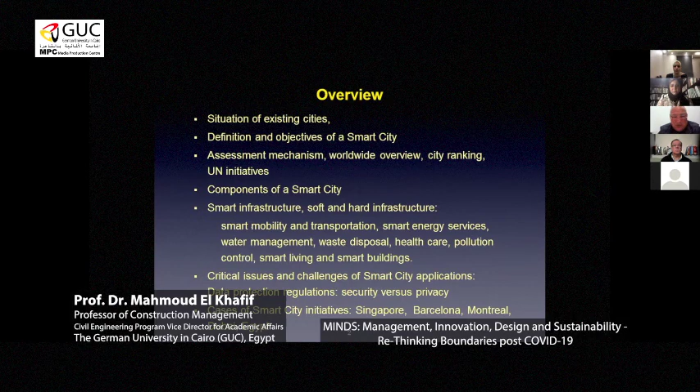First, we'll talk about the situation of existing cities worldwide, and then let us define and give the objectives of a smart city. Something about assessment mechanisms, a worldwide overview, city ranking, and UN initiatives, and then the different components of a smart city infrastructure, soft and hard infrastructure, a word on critical issues and challenges, and if time allows, I will give you some cases of smart city initiatives in Singapore, Barcelona, Montreal, Dubai, and also what Egypt thinks about smart cities.

The worldwide situation is characterized by a very rapidly growing and increasing growth in population. By 2050, we will expect to have something like 10 billion people on Earth. Along with this goes an increasing growth of urbanization, meaning we will have, by 2050, 70% of people living in cities. That means we will have a high concentration of resource demand, consumption, and pollution.

Regarding Egypt, we are already now 3.2 million over the forecasted population number. So what has been forecasted 10, 20 years ago has been exceeded by 3.2 million as per now. In the same time, we can see a significant migration from rural areas in the south into the urban northern parts, with a high concentration in Greater Cairo.

Significant development efforts to decentralize the population into new communities are underway. So the government is active in building new cities to relieve Cairo, or Greater Cairo, from ever-growing population. But this also needs some time and will take certainly a couple of years once people are prepared to move outside of their common living areas.

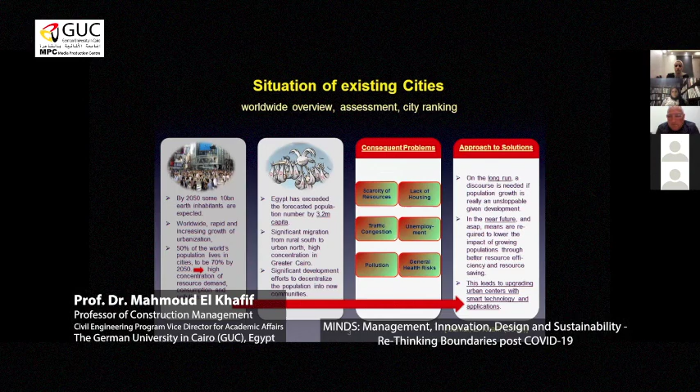Definition and objectives of a smart city. There is no commonly agreed definition of a smart city, but there are shared elements among the most prevalent definitions - for example, the usage of ICT, information and communication technologies. Everyone aims at improving the infrastructure and tries to ensure economic, social, and environmental sustainability. These are the commonly agreed shared elements, but there's no overall agreed definition of what a smart city actually is. But we will learn by example, and hopefully we get a bit nearer to this.

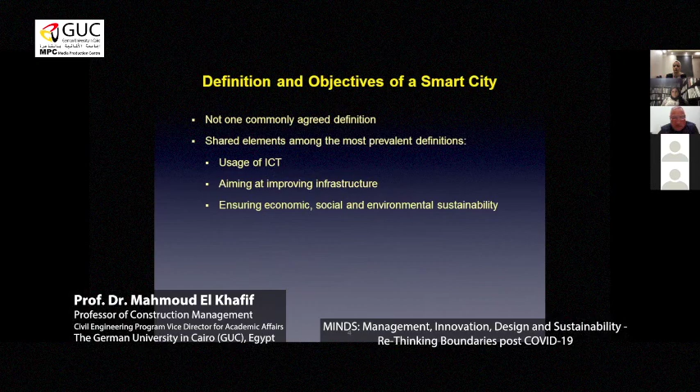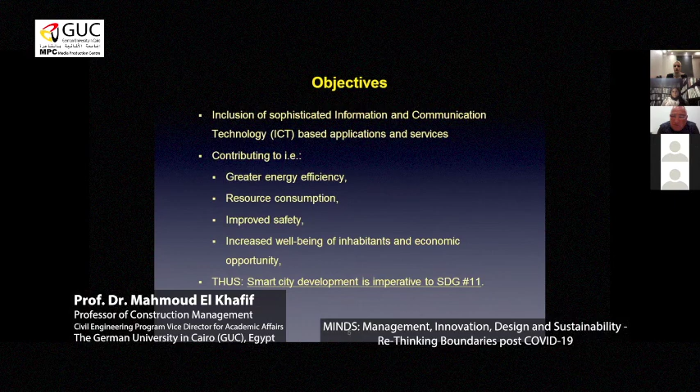Objectives: inclusion of sophisticated ICT-based applications and services, contributing to greater energy efficiency, resource consumption, improved safety, increased well-being of inhabitants, and economic opportunities. Thus, smart city development is imperative, to which I have just alluded.

How to assess the smartness of a city? There are different organizations - one of them is the ISO, the International Standardization Organization, and United for Sustainable Smart Cities initiative, and the IMD, the Institute for Management Development, stationed in Lausanne, who have initiated or developed a Smart City Index to rate the efforts and achievements of communities in reaching certain limits.

I will not go into all the details, time will not allow for that, but for example, the ISO rates and assesses community infrastructure, mainly for energy, water, transportation, waste, and ICTs, against enhanced technological performance that is designed, operated, and maintained to contribute to sustainable development and community resilience.

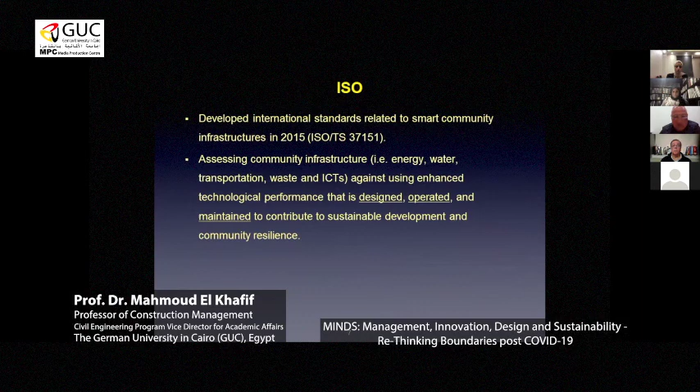The United for Sustainable Smart Cities Initiative has developed KPIs, key performance indicators, to quantify efforts and allow a listing or rating system with three main dimensions: economy, environment, and society and culture, with defined sub-dimensions that can all be rated.

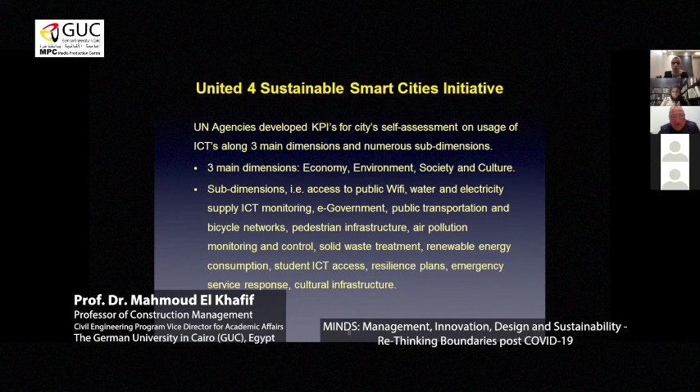The IMD Smart City Index, developed every year, compares 102 cities against usage of technology in 5 key areas: health and security, mobility, activities, work and school opportunities (education), and governance, with indicators that are rated to allow for a certain ranking.

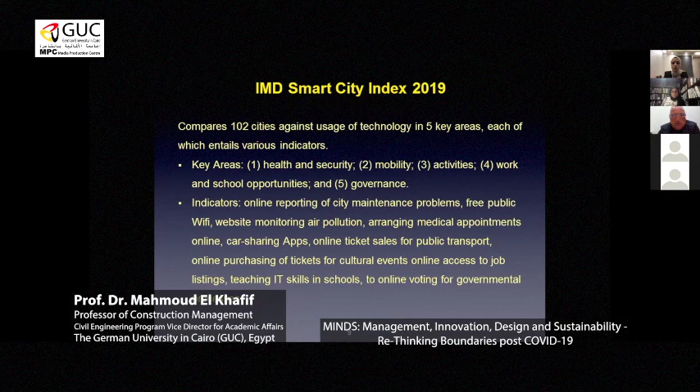In 2020, like in the years before, Singapore topped the list, considered a AAA smart city, worldwide leading. Number 2 has been Helsinki in Finland, then Zurich, Auckland in New Zealand. Number 5, Oslo. 6, Copenhagen. You can see quite a high concentration in the northern part of Europe. Then Geneva, and Taipei, Taiwan.

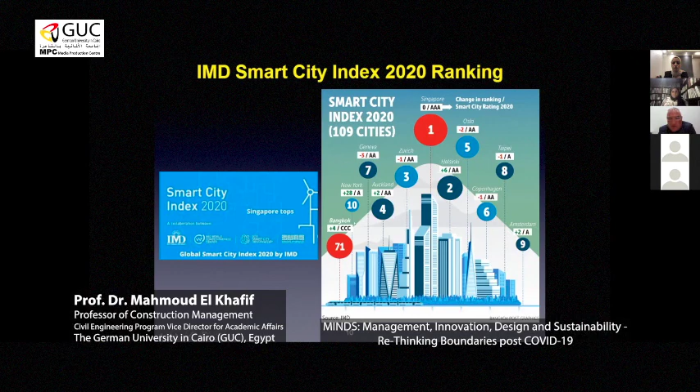Number 9, Amsterdam. Bangkok, with a CCC rating, has ranked 71.

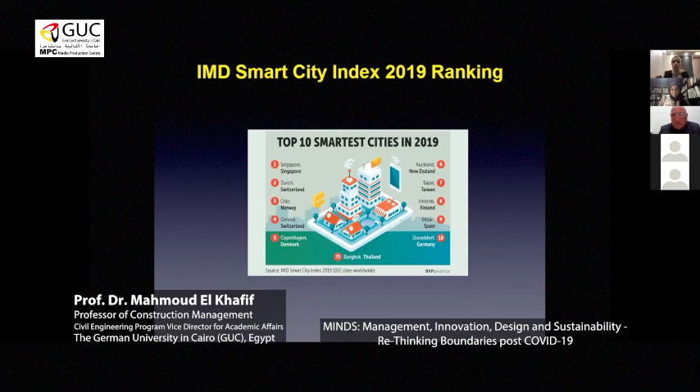In 2019, Singapore was already number 1, but there was a little bit of reshifting. I'm quite happy that my old hometown, Düsseldorf in Germany, was among the first 10 cities, though they fell back in 2020 to rank number 13.

The total of 102 cities is listed here. We can see Cairo at rank number 99 in terms of smartness worldwide, but other cities like Sofia, Mexico, Kiev, Cape Town, Athens, and Rio de Janeiro are not very far away.

So we are in a group of cities worldwide where our ranking is not very good at the moment, but this also offers a very large potential for improvement. I see such challenges as a chance. Little changes in certain fields will already give us a much higher ranking and will hopefully improve the living conditions of the citizens to a certain degree.

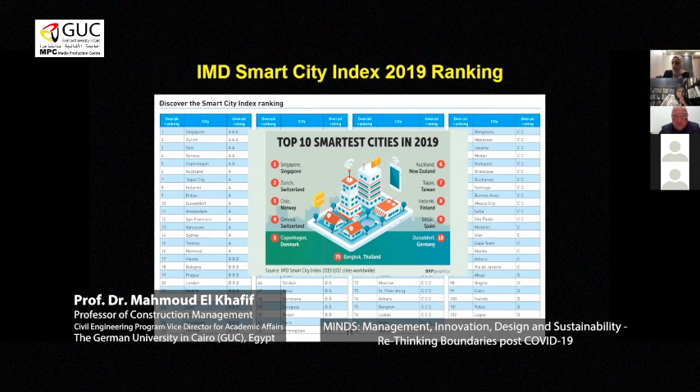Coming now to a small repetition of the SDGs, I will confine myself to number 9 and number 11. Number 9 is mainly about infrastructure, industrialization, financial services, and sustainability. Infrastructure, our field as civil engineers, is something we have to think about, but it's not only civil.

The interesting part I found when I prepared the presentation is that the smartness of a city brings together many disciplines. It's not only civil engineering, or only ICT, or only IT. Many disciplines have to come together and present, in the end, a conglomerate that represents a smarter approach.

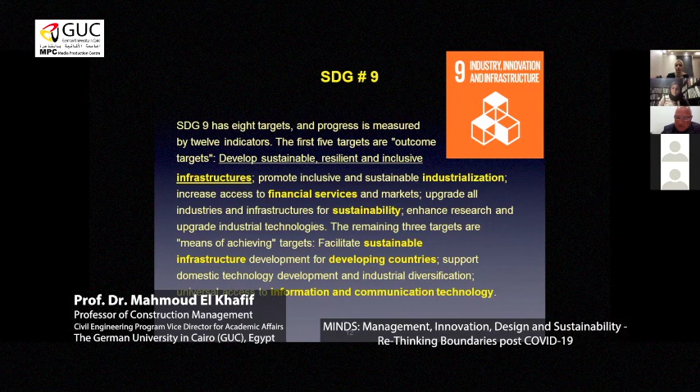SDG number 9 talks about infrastructure, and number 11 aims at an inclusive, safe, resilient, and sustainable city. Urban challenges currently include congestion, rising pollution, lack of adequate housing, lack of funds for energy and basic services, declining transportation systems, and amplification of challenges due to rising population in urban cities.

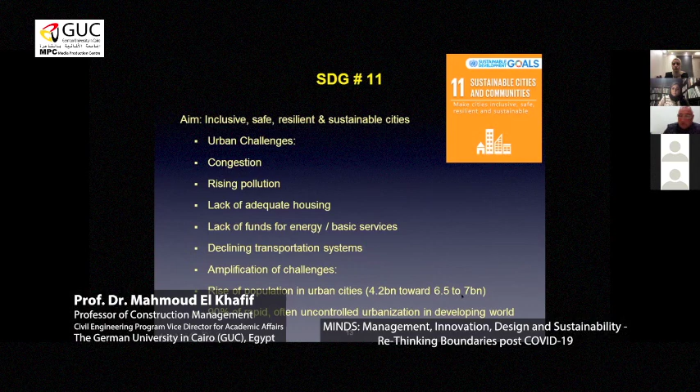We will reach something like 7 billion people, almost the entire world population today, living in cities by 2050.

So what are the components of a smart city? Number one, smart infrastructure, which includes public transportation -- a public mass transportation system, as opposed to individual transportation -- as well as water and wastewater management. Water will become an ever-decreasing commodity.

Especially here in Egypt, we will face challenging times, I would guess, with increasing population and, in the future, less water supply.

Energy efficiency: I recently read an article and was surprised to learn that in Egypt, for example, the energy consumption per unit of production is something like 3 to 4 times higher than in industrialized countries like Northern Europe, due to lack of efficiency in energy use.

We're aiming at improved citizen service, public well-being and public health, security, and pollution control.

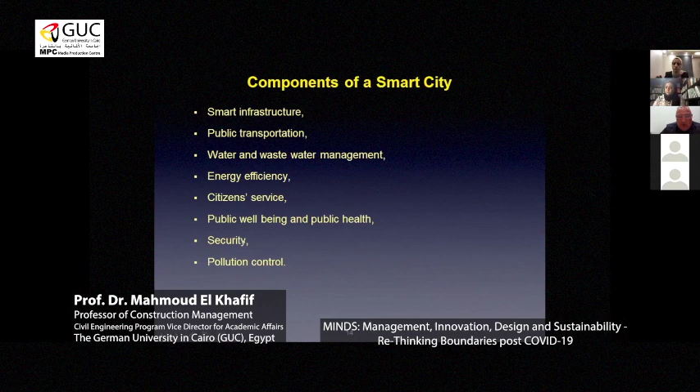In other words, the components and characteristics of a smart city include: smart mobility, smart living, smart government, smart environment, smart economy, and, very importantly, smart people. We cannot expect big improvements from nicely installed smart city applications and systems without having people educated to use those systems as users and to maintain and further develop them as operators.

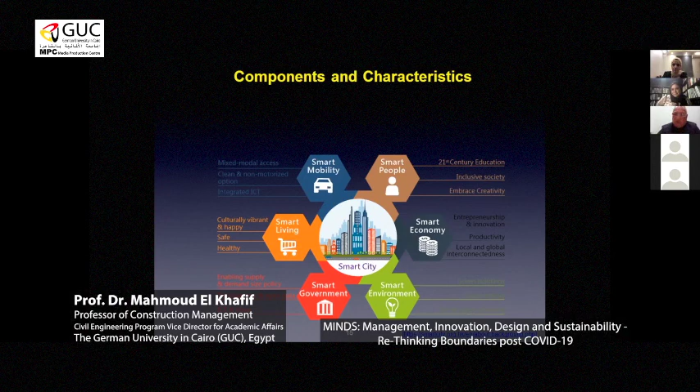This is something very important to keep in mind -- the human resource that needs to follow, in order to be able to take benefit of those smart systems.

A smart city, a smart infrastructure, and smart devices in the end go back to ICT. So I can have a nice hard infrastructure, let's say a nice bus system or a subway system. If it is not well equipped and not well integrated with a strong ICT system, it will not be smart. It can be very efficient as a hard infrastructure, but what makes it in the end smart, and therefore more successful, is ICT.

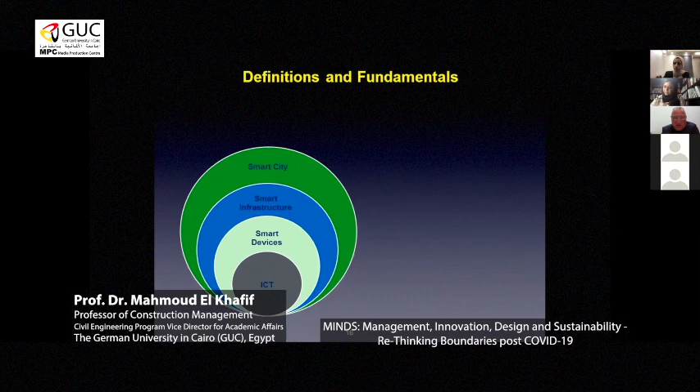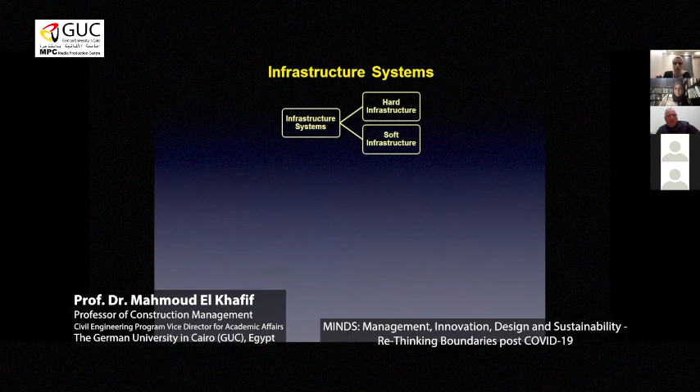So what are now smart cities infrastructure systems? First of all, we differentiate between hard and soft infrastructure. I bring here the fields of energy, water, waste, transport, and landscape. The question can be, is it now hard or soft? I would say it's always both. We need hard infrastructure systems to be equipped with the soft part in order to become really smart.

That counts for energy systems, that counts for any kind of water and waste systems, of course transport. So what we think about smart always are signboards with digital information in subway stations or over highways and parking systems, etc. But it is actually far more. If we go back to the objectives, we can see where do we want to reach at, and what are then our means in order to have a chance reaching our objectives.

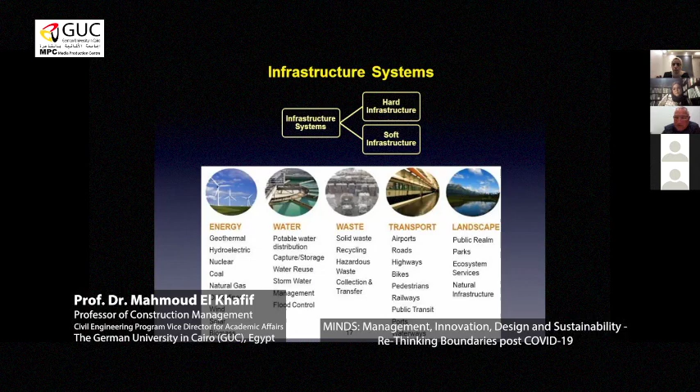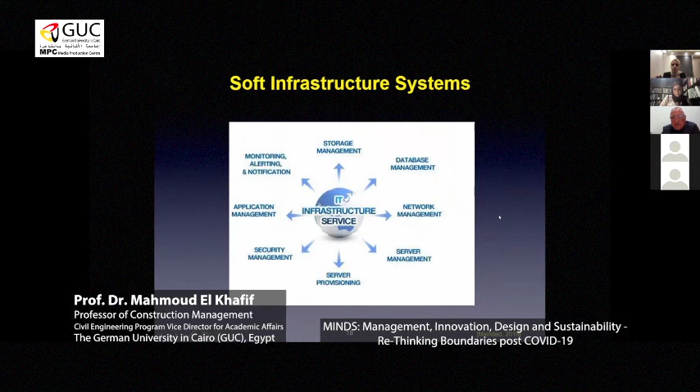The IT infrastructure services, of course, are an overarching umbrella over all these systems. Basically, everything has to be managed in terms of data. All the network servers, security systems, application management, everything is subject to IT management systems, otherwise it wouldn't work.

Smart mobility and transportation. At the forefront, smart public transportation. I remember when I went to Singapore the first time, that was in 1997. I stopped over in Singapore, and I was amazed to see hardly any private cars in the street. Some privileged individuals, yes, they were driving, but I would say 90% or more of the population was in a very efficient, very safe, and very clean public transportation system.

It was amazing to me in those days to see such kind of a community going smoothly without any interruption and absolute safety by using, for example, smart public transportation systems. So the reduction of individual transportation in private cars and the replacement by public transportation systems is a core part of the city becoming smarter.

Then, of course, the guidance and management of traffic by intelligent transportation systems. Components are traffic lights, cameras, road buried queue detectors, etc. And of course, a central control system with public addressing and traffic guidance.

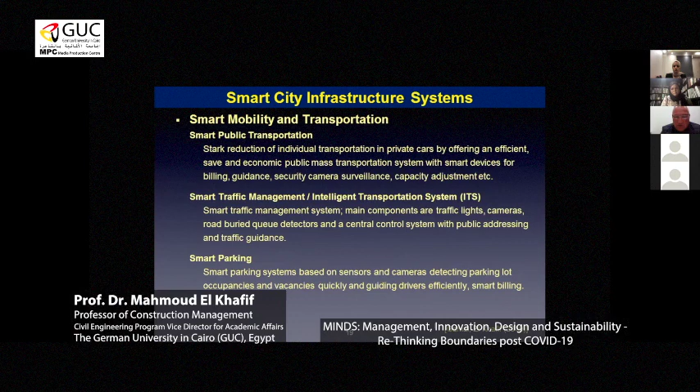In graphics, advanced traffic management systems, advanced vehicle highway systems, commercial vehicle operations, advanced public transportation systems, advanced traveler information systems, all this comes together and forms in the end an ITS.

Example, parking. The driver of this vehicle will have an app. The app knows by GPS or GIS where an empty parking slot is available, tells the driver to park in, and pays via the app automatically his parking fee.

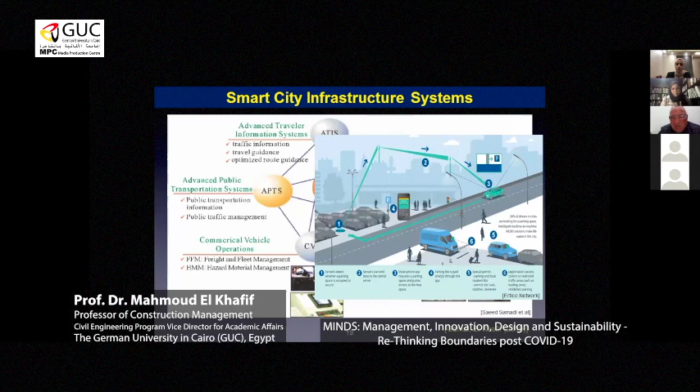That is also the other side. These systems, of course, cost money, but they also save effort, and they save resource, and they save pollution, and would guarantee to the community also a good income. In the case of Barcelona, this is a major contributor to the city's budget, that parking fees are raised much more efficiently and without disturbance. So it is like a VAT being paid with every good I'm going to buy.

Smart energy grid or energy services, starting with the energy grid, analyzing data on the consumers will give a chance to adjust the supply. So a supply and demand optimization within a community, within a state, within a larger city, within a region, within an international community as well, is part of using the resources and the capacity in a more efficient way.

I will have higher efficiency if I have a power plant being used by 70–80% rather than by 25%, and sometimes I need 110%. So the equalization of demand and supply within a region or a defined area is part of the smartness of a city or of a region.

District heating and cooling, here comes the economy of scale into the playfield. A larger central plant has generally a higher efficiency than a larger number of decentral small aggregates or small plants. That's a fact. And the basic idea for district heating came actually from Eastern Europe in the 60s and 70s, where whole cities were heated by the exhaust heat from power plants.

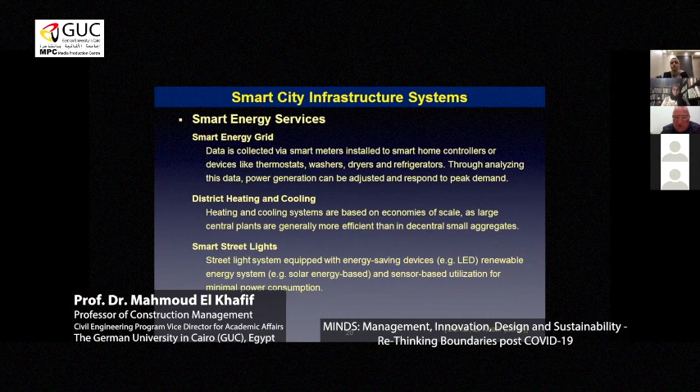In Egypt, we have, for example, a district cooling system in the smart village on the Cairo-Alex Desert Road. There we have a large central cooling plant that supplies the entire smart village with chilled water to run the air conditioning. We also have smart street lighting equipped with energy-saving devices like LED, renewable energy systems based on solar energy, and sensor-based utilization for minimal power consumption.

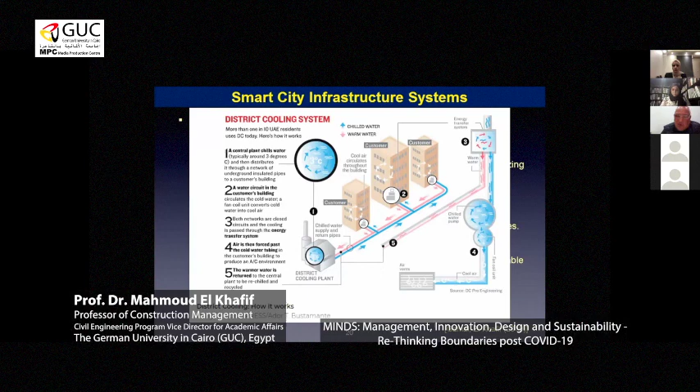That's how a district cooling system would work. We have a district cooling plant that produces very cold water. This cold water is distributed to the consumers through buried, well-isolated pipes. It reaches the fan coil units and is translated into cooled down air. The water is then circulated back to the cooling plant at a higher temperature to be cooled down again, as per the demand of the building. We have this here also in the GUC - that's the principle that works with chillers on the rooftop. They produce cold water, which is distributed to consumers in every room and translated into cold air through the fan coil units.

Smart street lighting with LEDs can save up to 50% of the energy compared to regular systems. These light poles can also be equipped with sensors that actuate the lighting source as per the actual need.

How many times do we pass by streets at 4 o'clock in the afternoon and the street light is on? It's useless - it's a waste of energy, a waste of resources. Meanwhile, sometimes at 8 o'clock at dark night, they are not yet on, and that's a lack of service.

All this can be avoided if we have an automated system that measures the sun irradiation and the daylight provision, and adjusts the additional light energy to serve the roads or facilities we want to illuminate.

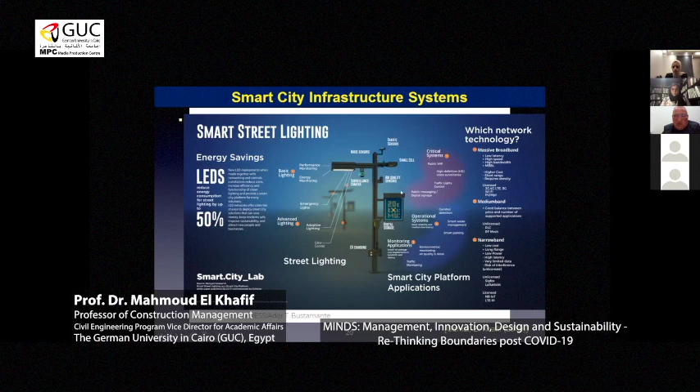These lighting poles can also be equipped with noise sensors, surveillance cameras, traffic sensors, small cells for energy, air quality sensors, and panels for traffic information.

Smart water management - we have to stop waste of water. Water is a scarce commodity, especially here in Egypt. We know that very well.

A smart water distribution system should be able to detect, for example, pipe leakages. It is estimated that the fresh water running through the potable water system - water that came from a natural source and was treated at high expense to become potable - is to a good part being lost. I'm talking about 30 to 50% in large cities worldwide, not only here. It's lost to a good part simply due to leaks in the water network, and this has to be detected and repaired. So for this, sensors can be used to make sure we have minimum losses in this scarce commodity.

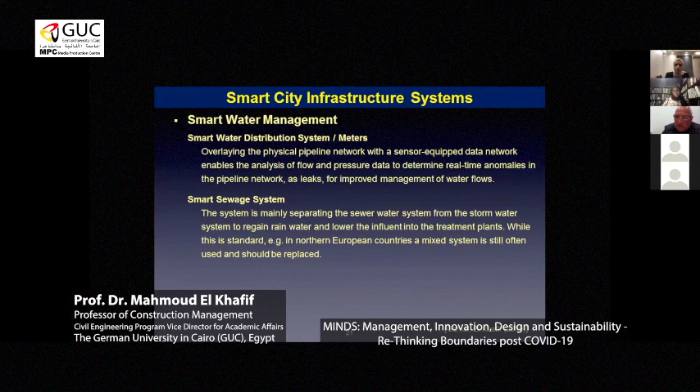Smart sewage systems as well - there are possibilities to improve and make sure that the treatment plants are charged with the minimum amount of sewage. For example, stormwater and rainwater can be regained and is normally collected separately, not in a mixed system.

I will go a bit faster - the time is running a little bit.

Smart waste disposal systems - cities are creating large amounts of waste, household waste and other kinds of waste. A smart bin system, for example used in Holland, makes sure that the bins are regularly relieved of waste, but only when they are really full, so that the truck that cruises around to collect the waste from the bins is not running empty.

In healthcare systems, ICT-based solutions could diagnose medical conditions and help prevent emergencies before it's too late, and would also enhance rescue services. Pollution control systems are, of course, very important.

The air quality and the water quality mainly are issues that need to be monitored, and should issue information to decision makers on when, for example, to put restrictions on individual transportation and on industries.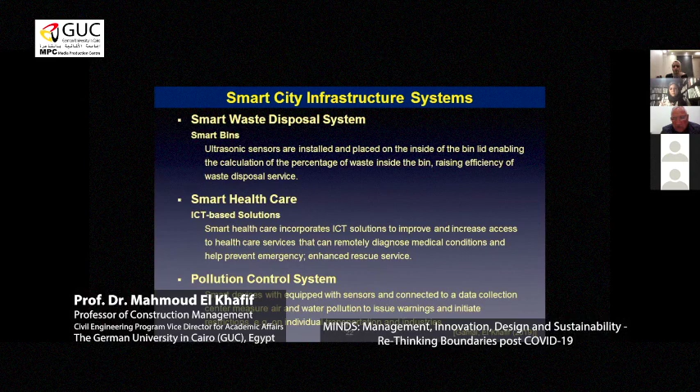Sorry, that was wrong.

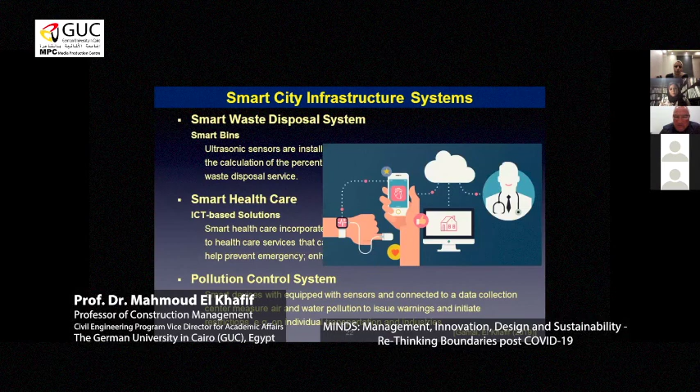So, smart living and smart buildings. Coming now to a very important issue, buildings, and I will go a bit faster through this slide.

Buildings are the biggest polluters and the biggest energy consumers. They consume roughly 40% of the energy of a country's economy, and this has to be controlled. If we can reach a significant saving in this 40%, then we have done a big step forward.

That could be done, for example, through occupancy sensors, indoor service controls, building security and surveillance, indoor positioning systems, and also electrochromic windows and louvers, as shown in this picture.

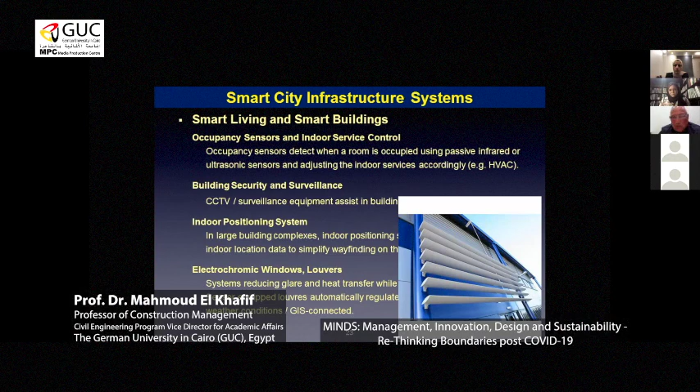The building management system is basically a system that automatically issues centralized control on the building systems, mainly the HVAC—heating, ventilation, and air conditioning—but also electricity, lighting, shading, access control, security systems, etc. These are systems that will help reduce the energy consumption. We talk mainly about energy, but also the water consumption of a building, to a very high degree.

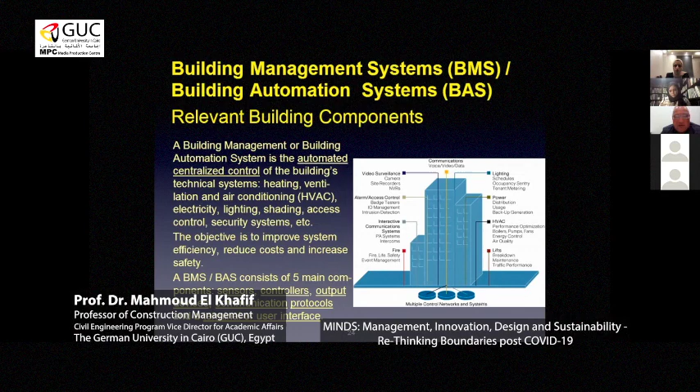Green buildings and smart buildings are not the same, but they have overlapping areas, and that also has relevance to SDG number 11.

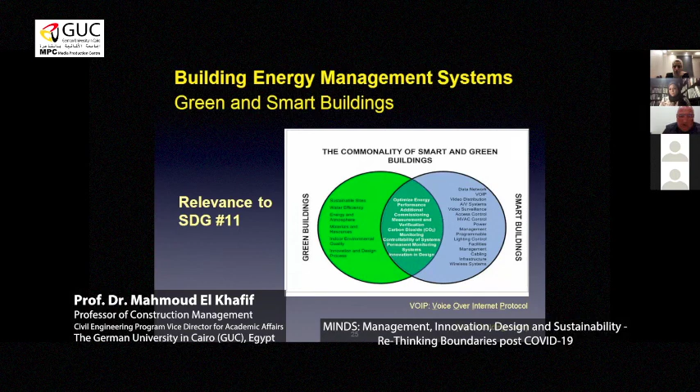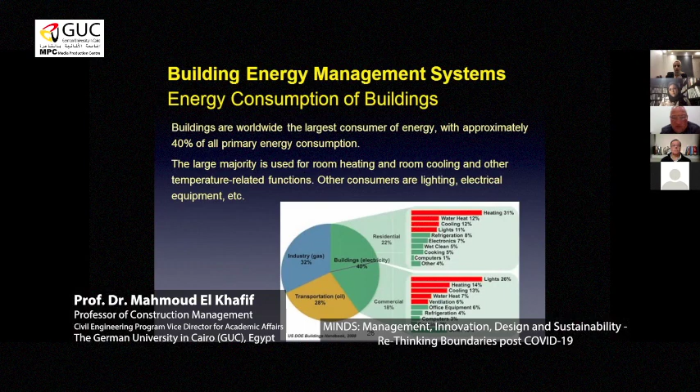A small breakdown here, I will go quickly through it. Buildings account for 40%, far larger than transportation, which people always talk about, and also much larger than industries. These are the figures for the US, mainly consumed in functions that deal with heat or cold—air conditioning, heating, water heating, cooling, refrigerating, etc. These are the main consumers, and we have to work on reducing the consumption of those functions.

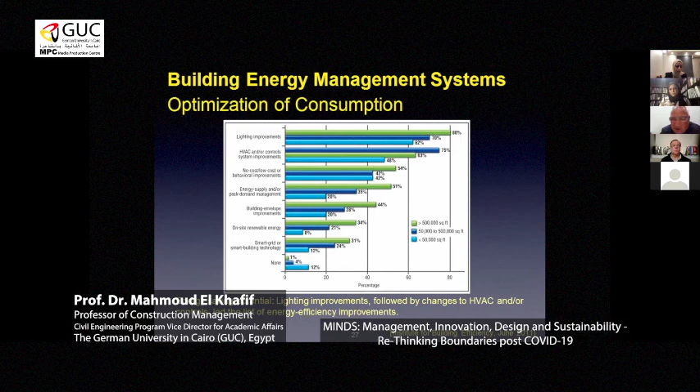There are large potentials of savings. The graph shows, for example, in lighting improvement in very large buildings, up to 80% of the energy could be saved. In HVAC, 60 to 70%. So you can see there's a large potential of doing something. And if people say, well, we need a smart city, I say, well, we can start with a smart building, even with a component of a building, and then we have done a step forward. And from there I see...

So just a small example here, a standard office building, for example.

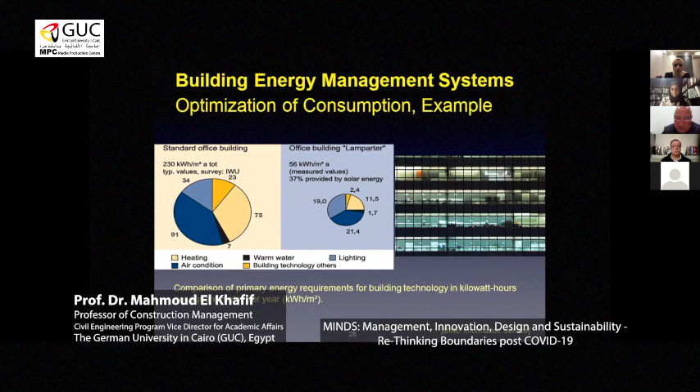A standard office building, for example, consumes per year 230 kilowatt hours of energy, while an optimized building would require only a quarter of that. So there's a big potential of doing something on these 40%, and we are talking about private buildings.

When a private investor should do something in this field, he will say, well, it's too expensive. I say, yes, these systems are not cheap, definitely, and they require significant investment.

However, an energy reduction would also increase the property value. A facility, a building that requires less energy and would relieve the owner or the tenant of higher monthly bills is more attractive. The value of this property will automatically rise, and the vacancy will go down because these buildings will be much sought after.

Of course, this is also a function of the electricity price. But electricity prices here in Egypt—they have basically scrapped the subsidies, and they will go up further, as we have seen in other places. This will make these systems even more attractive.

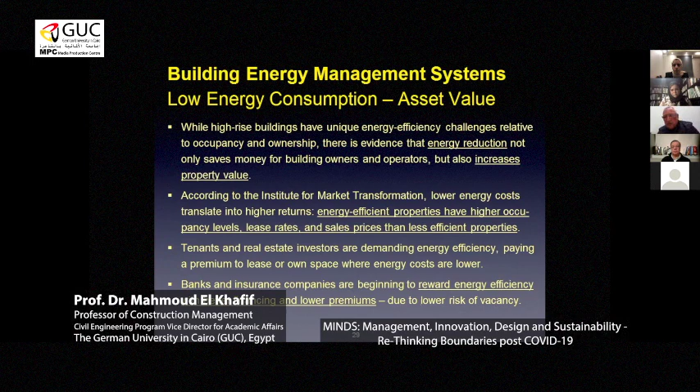Even the banks and insurance companies in some places are beginning to reward energy efficiency with better financing and lower premiums, due to lower risk of vacancy.

A word on critical issues and challenges of smart applications: data protection regulations. The state has basically access to sensitive personal data. We have cameras, we have sensors, we have everything everywhere. Data protection and personal rights are to be considered as well.

There are data protection regulations—the EU's General Data Protection Regulation of 2016. However, it protects only individuals from misuse by public-private actors in the EU. It's not a worldwide valid regulation.

The Cities Coalition for Digital Rights of 2018—and you can see all these initiatives are quite recent—issues at least shared principles for policymakers to safeguard digital rights. So these are not very many, but we have to be aware that with every new technology, there are lots of benefits and lots of potential to be used and to go in the right direction. On the other hand, we have to put the right rules into the game to make sure there is no misuse, and we really take the benefits by avoiding the negative parts.

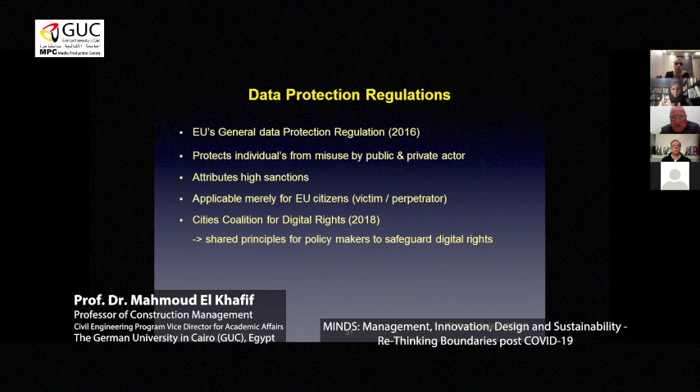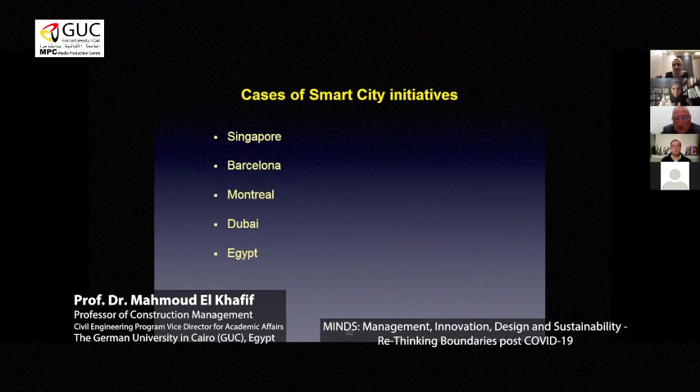So I think I have no time to go into details regarding our cases here: Singapore, Barcelona, Montreal, Dubai, and Egypt. They are not all the same.

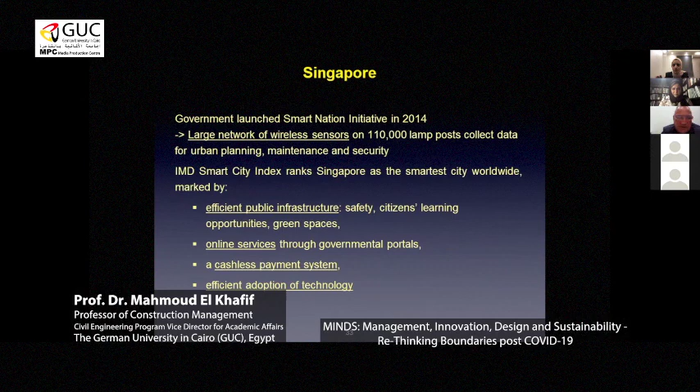Singapore, for example, is a very technically driven place, and they put the technology and the technical control at the forefront of their thinking. Barcelona is also technology driven, but also it goes into savings of resources, job creation, healthier environment. They are improving the city's income situation, for example, as I mentioned, the parking revenues.

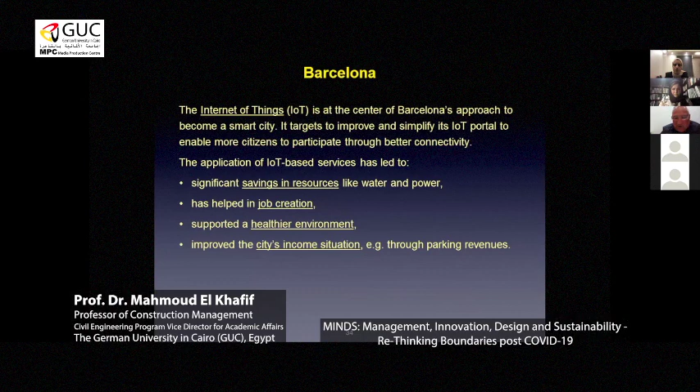Montreal is approaching, like Helsinki, for example, to involve also the public into the urban decision making. So they want the public to be part of it. That goes into the direction of democratization.

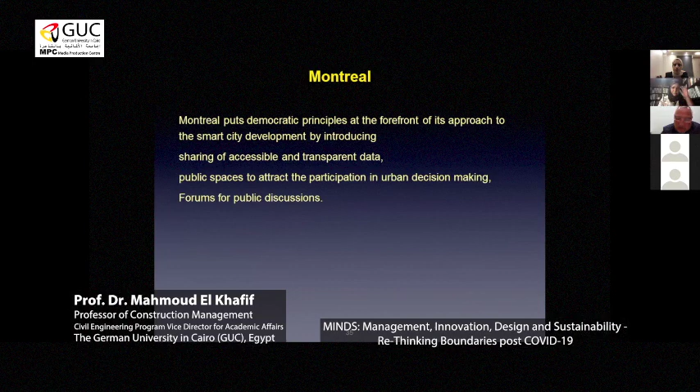Dubai is technology driven. They're using a personalized approach, mainly collaboration. They are counting on public and private stakeholder collaboration, streamlining resources for maximum efficiency. So this is a mix of

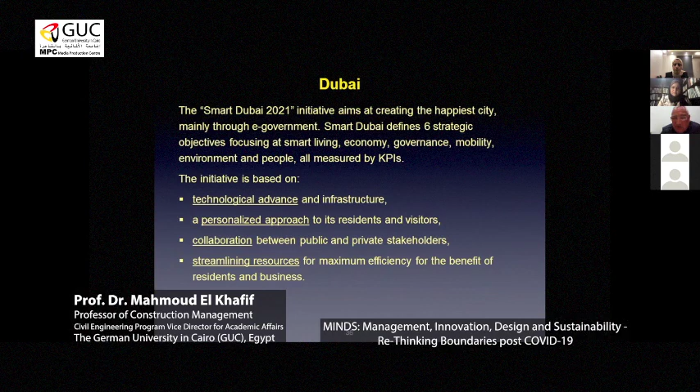well-being and pure technology. Egypt, as I mentioned, we ranked last year at place number 99 out of 102. That is not so impressive. However, the chance of improvement is also given, and a small advance in certain areas will move us forward from place 99, hopefully very quickly.

The government has issued the 2030 sustainable development agenda, with initiatives to decentralize Cairo, for example the new administrative capital and other new urban communities being built. Let us hope that these new areas and urban centers will be accepted and come to life. It's not only about building them, it's also about making them lively communities.

In order to be smart, cities need to be sustainable and inclusive. That was a key message of the Ministry of Housing to the UN Habitat conference. People are currently working here in Egypt on an Egyptian smart city code. It's under consideration, and I'm hopeful that in the new communities, where it is relatively easier to implement smart applications than in already existing cities like old Cairo, we will see quite some improvements, and we can see the first ones already now.

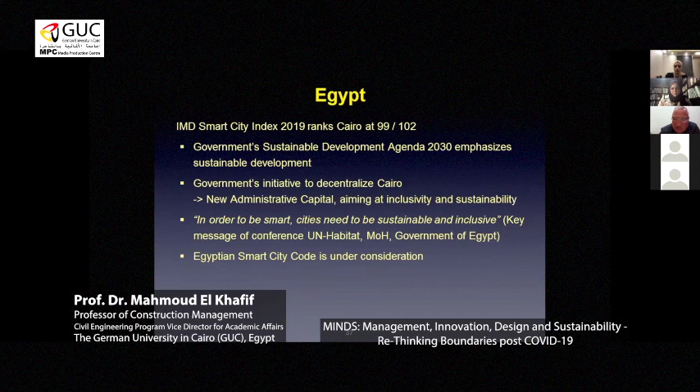In conclusion, along with the alarming phenomenon of rapid urban population growth and energy demands, there's an urgent need to develop and equip existing cities with more sustainable functions based on smart applications, to preserve and optimize the usage of natural resources. Smart city infrastructure components present the key to more efficient urban services, enhanced living quality, more prosperous economic life, better resource sustainability, increased energy efficiency, and reduced waste and environmental emissions.

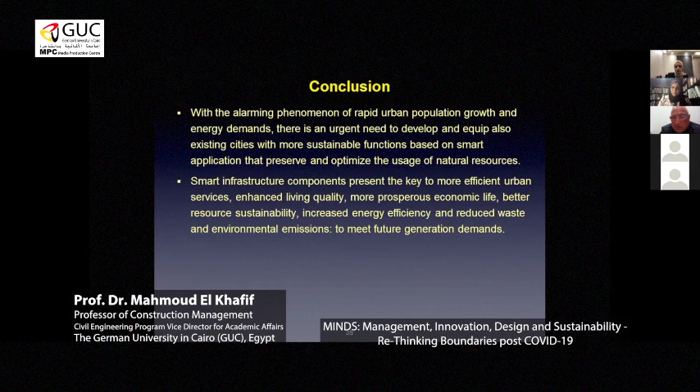That means we are meeting and hopefully safeguarding future generation demands. As I said, with every new technology we have lots of benefits, but we also must put into place the regulations and control mechanisms so that we take the benefits and are not exposed to misuse.

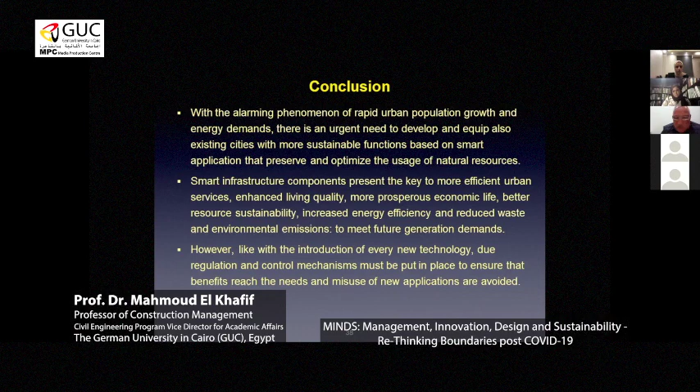Thank you very much, I think it was really interesting, Dr. Mahmoud, and I'm sure the audience benefited. I also have a lot of questions. We are running a bit out of time, but Michael has kindly allowed us to take a few minutes from his slot, so we can take 1 or 2 questions from the audience. Shall I stop the screen share? Yes, please. Okay, all right. So let me start by opening the floor. I think this will be a general question from all of us.

To what extent are smart cities green cities? You said we wanted smart people for smart systems. So do we also need people to become more green?

Yeah, first question, green and smart - are smart systems green? It's of course not the same, but there is no green city without smart elements, and most smart cities are automatically green. So there's a large overlapping area. I could go back to this slide where we need the introduction and establishment of smart applications, for example pollution control, water quality, air quality, where automatically the outcome will be greener. So I think they are almost going in concurrence. We can go into many details there, but the important message is: both cannot live without each other. Or let's say the green cannot live without smart, and if we are going smart, automatically we are going green.